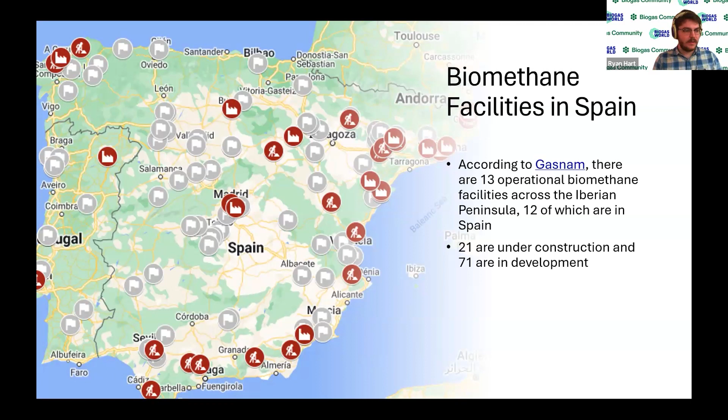Growth is very likely to continue across this market as major developers have announced plans to increase their share of biomethane and companies look to decarbonize their gas use. The two largest commitments are made by Biogas Peninsular, who has announced a partnership with a private equity firm and plans to build 64 new biomethane facilities, as well as Spanish gas utility Naturgy, which has announced 60 facilities to be in various stages of development and planning and is aiming to be a leader in the Spanish renewable gas production space. Most upgrading technologies are currently represented within the Spanish market.

However, membrane separation is currently the most utilized. With the market still so young, there is no guarantee that this trend will continue as further developments and facilities will select the most effective technology for their contexts.

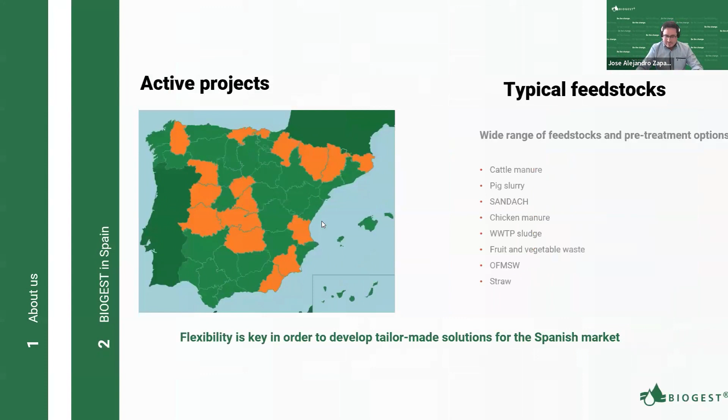Now in Spain, we are currently working on several different projects across almost every autonomous community. In this map, you can see where we currently have active projects where we hope to build a biogas or biomethane plant in the near future.

These plants are spread overall in Spain, but we've noticed an accumulation of projects in some regions. For example, in Catalonia, as Ryan said before, also in Aragon, Castilla-La Mancha, and Castilla-León, these are the regions where we are developing most of our projects.

So now I'd like to talk about the typical feedstocks that exist in the Spanish biogas market. These projects have a wide range of feedstocks. Some are easier and some are not as easy, requiring either pretreatment or more retention time in the digesters.

For example, pig slurry is a big feedstock in Spain. We have lots of pigs here, and we have this feedstock in almost every project.

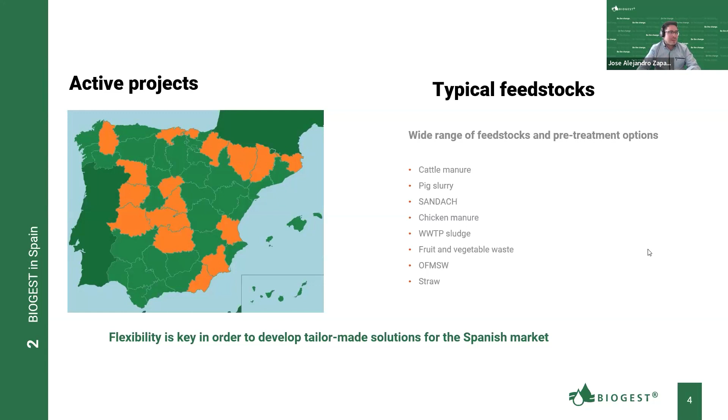Some of our solutions—these are the five solutions we are currently offering in the Spanish market: the Power Ring, the Power Compact, the Power SPF, the Power Digest, and the Power Tower. I'd like to talk a little deeper about two of them, the Power Digest and the Power Ring.

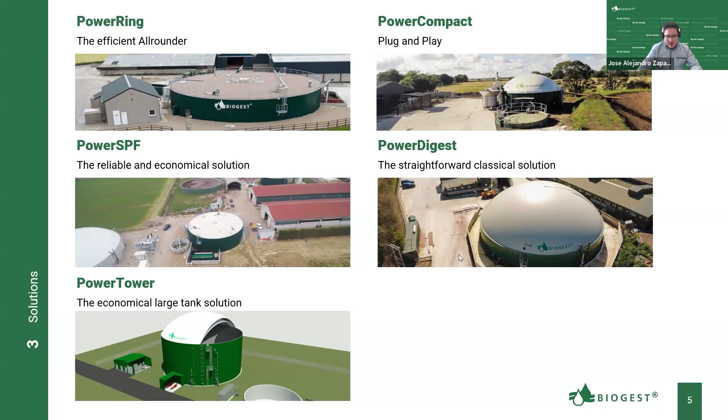Our Power Digest is what we call the straightforward, classical solution. In this type of digester, we don't have a concrete roof; instead we have a gas holder on top, which means we have to install the mixers on the walls of the digester. This works very well for easy feedstocks such as pig slurry, or fruit and vegetable waste, but it's not the best solution for other types of substrates.

Also, in this Power Digest solution, since we don't have a concrete roof and instead have a gas holder on top of the digester, we have some heat losses through the roof, meaning we have to consume more of our own biogas or biomethane production to keep the digester heated. So it's a very simple, economical solution, but it only works well for the easiest feedstocks such as pig slurry or fruit and vegetable residues.

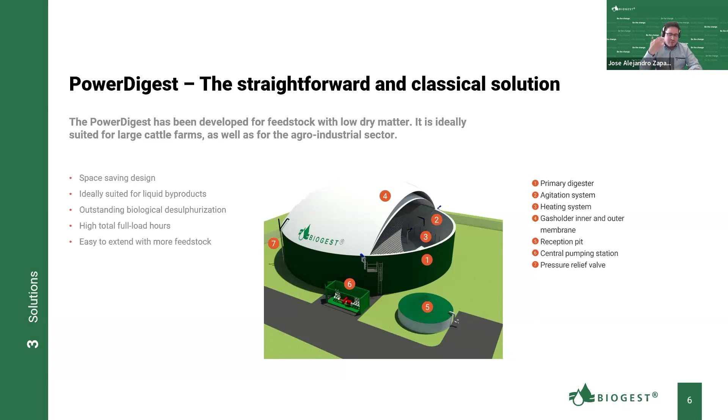So for the more difficult feedstocks, we have what we call the Power Ring. This is what we call the efficient all-rounder.

As you can see in this picture, we don't have the gas holder on top anymore, which would be an external gas holder. Instead, we have a concrete roof. This concrete roof allows us to put as many mixers as we want and in the position that we want. So in this case, the agitation in these digesters would be very good, and we would be able to work at higher dry matters.

Also, this concrete roof allows us to have much better insulation of the digester, which means that we lose less heat through the roof, which means that we would consume less biogas for the heating of the digesters.

On top of that, as you can see in the picture, the Power Ring is what we call a ring-in-ring system, where we have two digesters in one. The primary digester would be the external ring, where we have a kind of plug flow reactor, and the secondary digester would be the inner ring, where we have something more of a traditional flow with the classical mixers.

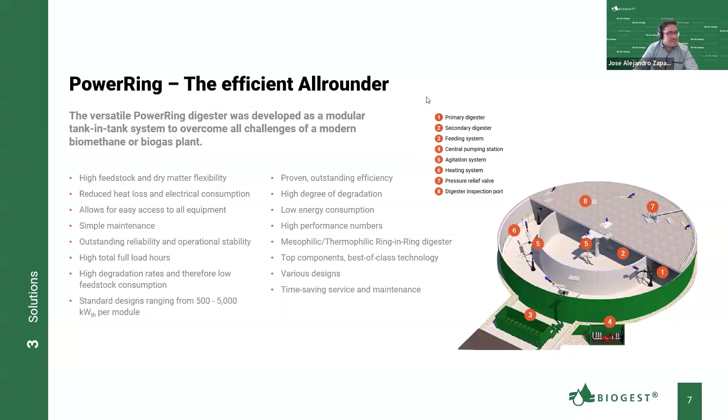The first one is from Francesco: is biogas cogeneration technology used in Spain for biomethane or gas-to-power applications?

What we are seeing currently in the Spanish market is that the majority of the plants are willing to produce biomethane also. What I mean is that they are willing to do this upgrading. From the projects we are currently working on, I'd say 90% of them want this biogas upgrading solution, for example, to create this biomethane for grid injection, and 10% of the projects want to have this cogeneration, the CHP solution.

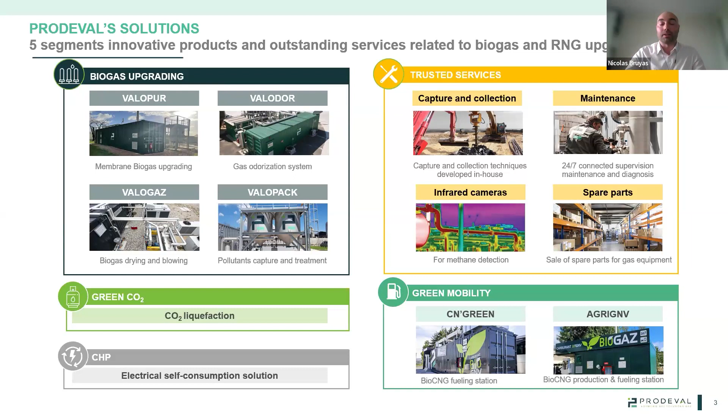So if we want to focus on the main numbers, now we have 30 years of operation, 6 subsidiaries, which are Italy, Czech Republic, US, Canada, where we have combined 25 plants, and of course Germany and Spain that we could talk about today. Overall, the group is more than 380 employees, with more than 100 technicians, especially for maintenance and commissioning of our plants. And we achieve an overall 400 units, among which 140 were commissioned last year.

We are in capacity of production of 150 plants per year, and now launching an assembly line to increase this capacity of production as we see the big boom for biomethane coming in Europe and in the rest of the world.

In France, the market share is more than 65%. This is our home market, but we look forward to other markets as well, such as Spain, and we'll talk about Spain especially now.

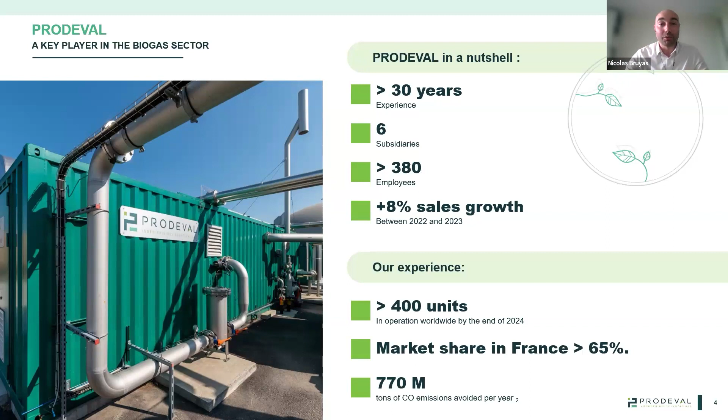In Spain, among the 12 projects that Ryan mentioned, we have one operating since 2021, and now 5 projects under construction. Mainly they are retrofits from CHP, so cogeneration to biomethane.

And the new projects, the greenfield ones, are now under authorization from the administration, which gives us a very good perspective for 2024.

The subsidiary is 1 year old, and we can already say that we will increase the capacity of this subsidiary, with the aim of having this subsidiary quite autonomous in terms of everything except the production, which will be kept in France.

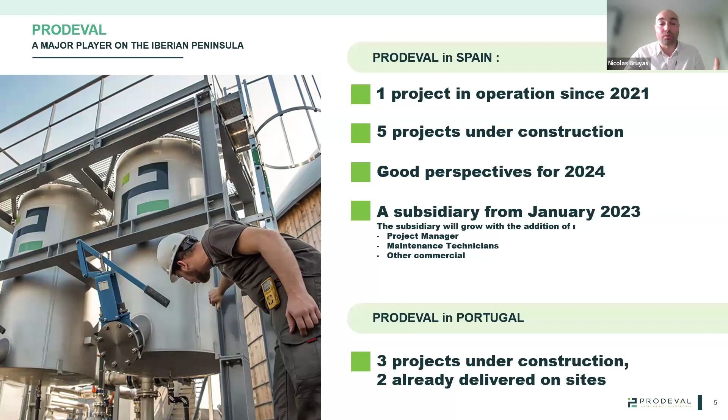More broadly for the Iberian Peninsula, we also have 3 projects under construction in Portugal, among which 2 are already delivered and waiting for the biogas to be produced.

About the biomethane sector in Spain, we are quite confident on the potential, because Spain is often ranked as the 3rd or 4th main important market in Europe, and very comparable to France in terms of resources. So we can imagine the same ramp up, or even more rapid ramp up for Spain, that we have seen in France for the past years, where there is now 650 plants injecting around 7 terawatt-hours per year.

Now in Spain it's only the beginning, but we already see that these 9 to 12 plants there, many more are in construction. I think this number will at least double by next year. And for sure, as the potential is quite equal, we can imagine that in 10 years there will be 500, maybe 700 plants for biomethane upgrading in Spain.

What are the challenges? What are the opportunities? The problem at the moment is that these greenfield projects are all under administration validation, especially for the environmental permits. The timeline for this is at least 9 months, but we never know when this will be released. So for us it's the lack of anticipation on when this big boom will arrive.

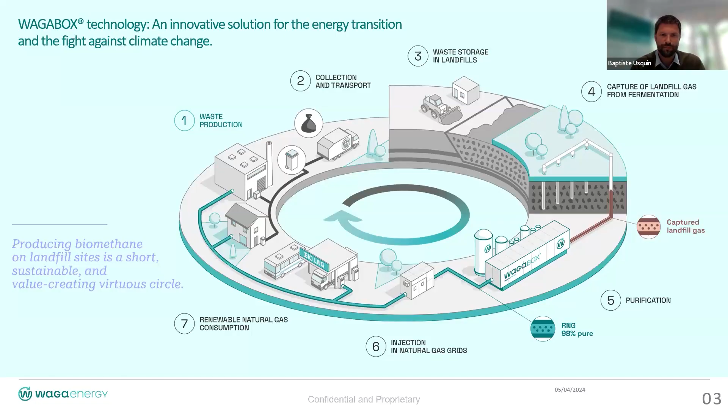Here is the first Waga box we commissioned in June 2023 in Spain. We are located in the biggest landfill in Catalonia, called Can Mata.

This landfill is run by a very important waste management group called PreZero, who provides the biogas. Then Waga Energy has built and is operating the Waga box in order to inject the biomethane into the local gas grid, run by Nedgia, in order to sell and develop the biomethane.

This project was funded, and it's important to stress it, by the European Commission through the Innovation Fund program for its impact on greenhouse gas emissions.

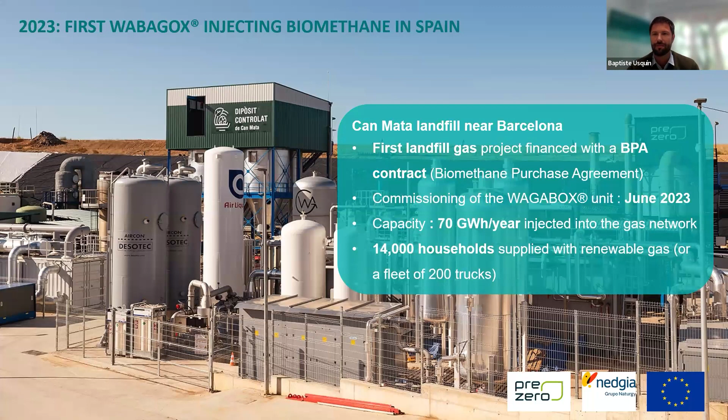We've been active for 5 years in Spain now, and over the actual project and activity of Waga Energy, I wanted to share with you the vision and bring proposals about the biomethane market and framework we have today, as of today, in Spain.

As for the vision, what we've seen is that Spain has developed first-in-class infrastructures in terms of renewable electricity - we have a lot of windmills, lots of solar photovoltaic plants. And with very good results, because often in Spain, more than 50% of the electricity generated comes from renewables. That's very positive.

However, of course, electricity is only a part of the energetic consumption of Spain, and more than 70% of the primary consumption of energy is still fossil. That's why we think it's important to develop renewable gases.

As of today, the right framework and the right ambition to really develop the biomethane market is not yet on the table. It's something that is ongoing, but we think there is a need to push the ambition on biomethane in Spain.

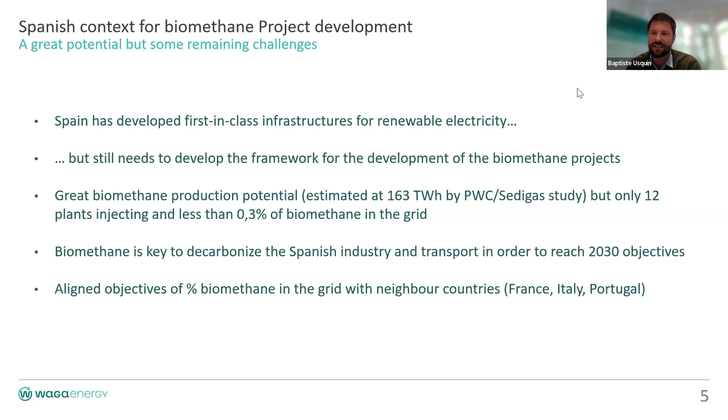So this is for the vision, and to get into more detail about the concrete proposal, I will share some ideas with you. The first one has also been developed by Nicolas.

Spain is a decentralized country with different regional administrations. However, we think it's important to have a common framework, a common logic on the processes in order to go faster in the permitting process. This is really key for projects to go into operation much quicker than today. To give you an idea, our concrete experience with Can Mata, the Waga Box of Can Mata, took more than 2.5 years to get all the authorizations and complete construction of the plant, and that's very long.

So, access to the grid. It is clear that in Spain, some key actors have understood there is a clear strategic need to decarbonize their activity. They understand that in 10-15 years they will definitely need renewable gases into their infrastructures for them to have value. It's not the case for all of them, and we need some rules to avoid speculation and too many projects that don't make sense, but also to allow projects to develop in an easier way with conditions that make sense and are based on rationale. There is something going on with public administration right now in Spain, and it will be key to really accelerate project development.